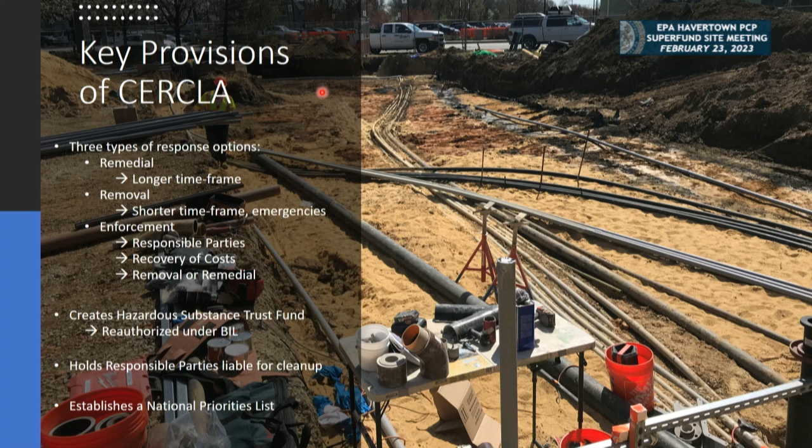We also have a program under Superfund referred to as removal. Removal and remedial work together a lot - that's happening a lot at the Havertown site. You can think of removal as dealing with emergency situations, or more shorter term acute spills or releases, or newly discovered potential threats to human health and the environment.

And then there's another part of Superfund that we call enforcement. What it really boils down to is Superfund has a goal of making the polluters pay their responsible portion for the work that's done. That can be through responsible parties performing removal and/or remedial actions, or paying EPA back for the federal tax dollars that we expend to perform the work at the site.

Under enforcement, we use the evidence we gather, where possible, to have responsible parties conduct the investigation and cleanup work. Superfund is called the Superfund because it collects a tax on the oil and gas industry, and on chemicals. Those taxes go into a fund that helps pay for investigation and cleanup work at sites where there is no responsible owner, or where the responsible party or parties are not solvent enough to perform all of the work. That tax expired in the early 2000s, and was just reauthorized under the bipartisan infrastructure law that was passed, so now it's actually just starting to kick in this year, in 2023.

One of the other things that Superfund does is establish a process upon which a site can be added to a list called the National Priorities List. That's essentially when a site becomes an official Superfund site, when it goes through the process to be added to the NPL.

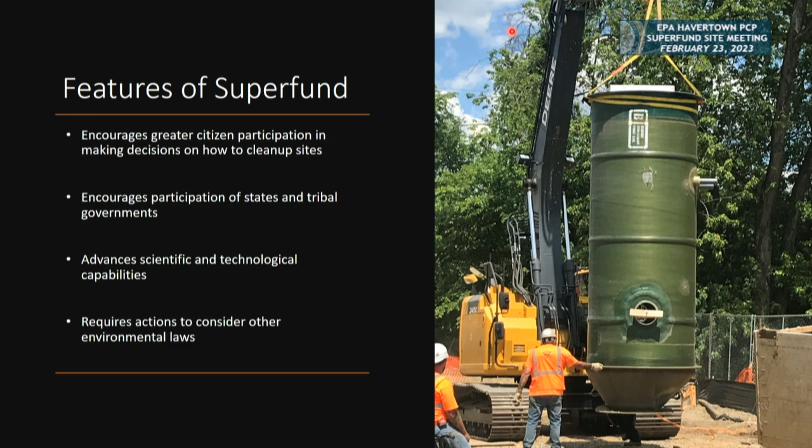States and tribes are also highly encouraged, or required where possible, to participate in all of our work. Some of what we're doing is cutting edge, especially as we move further along in attempting to treat contamination while it's still in the ground. Superfund really pushes the boundaries, working with academia and our Office of Research and Development to develop new approaches for addressing contamination. We have a unique facet in that not only do we have to follow the Superfund law and process, but we specifically have to take into account other federal, state, or local laws applicable to the work we want to do.

I'll use a weird-sounding acronym later called an ARAR. When you hear ARAR, it really means other federal, state, and local laws besides the Superfund law - we'll talk about what that means. That is a unique requirement of CERCLA, that we must take into account those other regulatory components that apply to the site.

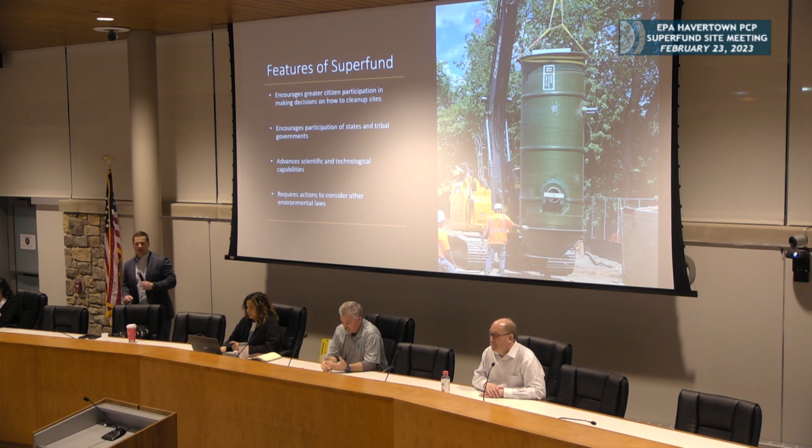If anybody else in the room knows more about this history, I love talking about this stuff because I always learn more about the things we don't know, or that at least I don't know, because not everything makes it into the records we have, and I certainly can't read every word in every record we have.

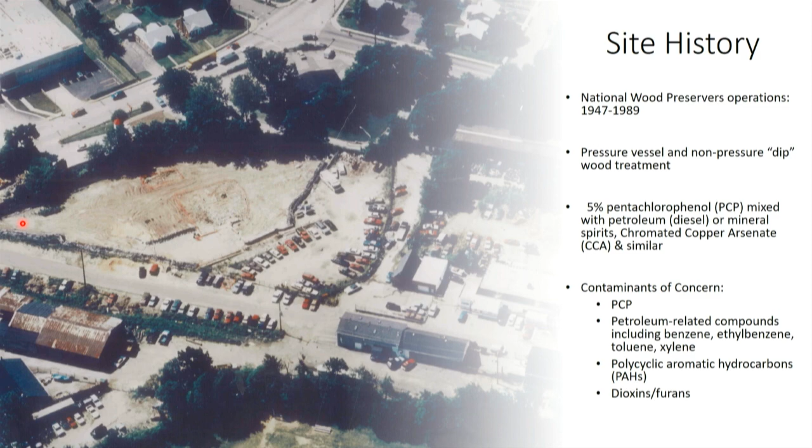National Wood Preservers used different chemicals to treat wood, either through pressure treatment, like typical pressure-treated wood, only not with the chemicals we use nowadays, or there was a dip process used to dip timbers for things like railroad ties or other pressure-treated wood needs. Then that wood was allowed to sit and dry on the property before being put out for sale.

The main preservative, the main protectant, was a chemical called pentachlorophenol, PCP. It's not the drug, but it's the same acronym - pentachlorophenol. That's our main bad actor here, the main contaminant we deal with, but there are many other contaminants associated along with the PCP. The PCP was mixed with petroleum products, typically diesel fluid or diesel fuel, or mineral spirits, for several decades. Eventually that process changed over to using metal salts, such as chromated copper arsenate, later on.

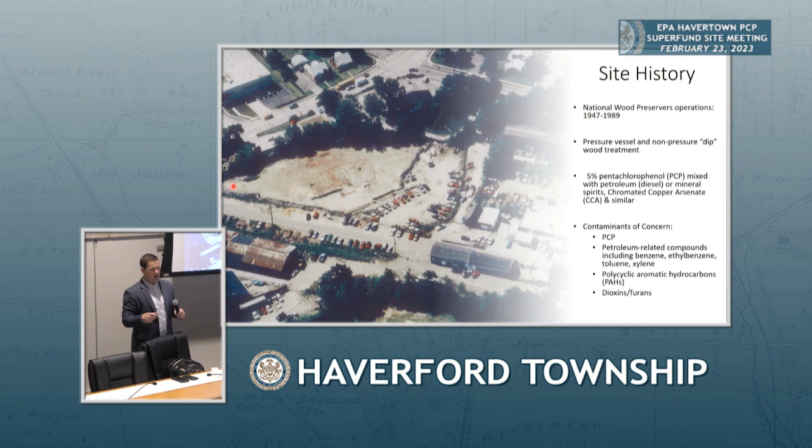But the main operation that really impacts what we see and what we're dealing with was this process that involved pentachlorophenol. So at the site, we have a wide range of contaminants of concern, but our main issue, our main indicator contaminant that we look at is the PCP.

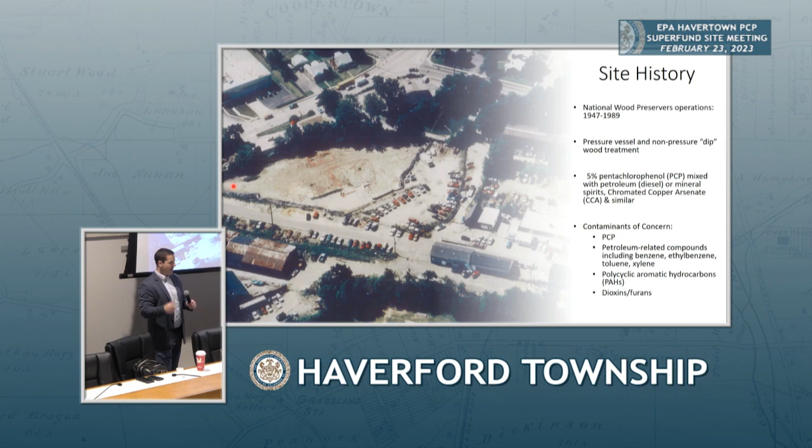Dioxins and furans are listed at the bottom of this. They're not as prevalent as the PCP when it comes to making up the overall mass of the concentration of contamination in the groundwater, but they also have a very high toxicity level, so much lower concentrations of dioxins and furans can also present unacceptable risk.

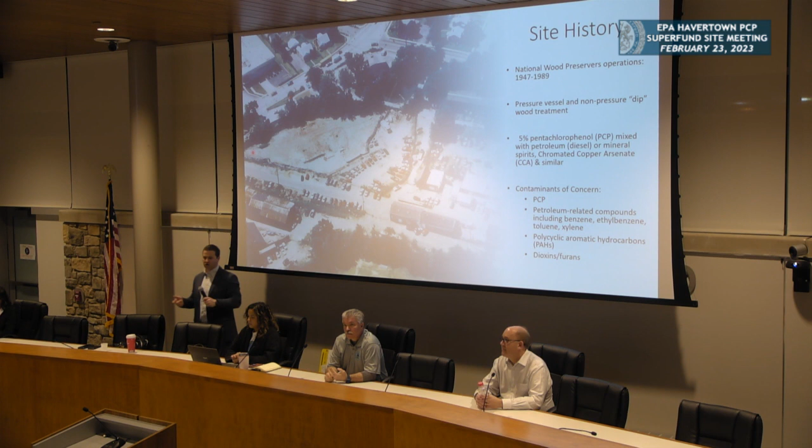We do have other petroleum-based compounds such as benzene, ethylbenzene, toluene, and xylene, and some other heavier hydrocarbons that we refer to as polycyclic aromatic hydrocarbons, or PAHs. All you really need to know is that PCP is the primary contaminant we're going to be discussing tonight, but our treatment process treats all of the contaminants of concern in our treatment plant.

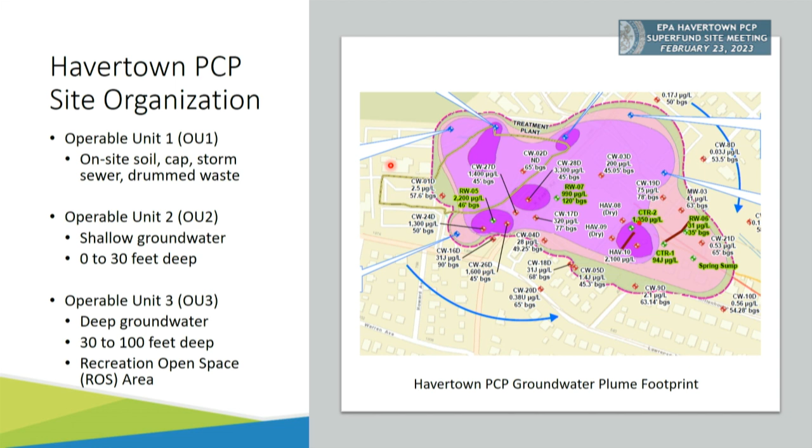Just for reference, if you could highlight Eagle Road, which is running essentially right here, and then Lawrence Road is running across this way. So just to reference, this area shown on the left with the yellow line represents our cap that sits over the former National Wood Preserver property. What's on top of that right now is the Mr. Storage facility, and some of the other industrial businesses to the west of that - just trying to orient everybody.

So the site is broken down into three different OUs, operable units. OU1 deals with the wood preserver site itself and the soil contamination that was there. There's a synthetic or plastic cap that sits on top of that, and then soil and other fill material placed on top of it. There was drummed waste that was removed from that site back in the 80s and 90s.

We also have a storm sewer that runs from Lawrence Road down behind Rittenhouse Circle and discharges into Naylor's Run. The lower section of that storm sewer, a 36-inch concrete pipe, was leaking contamination into Naylor's Run because contaminated groundwater was getting into the pipe through cracks. That lower part of the pipe was sealed as part of our work with OU1.

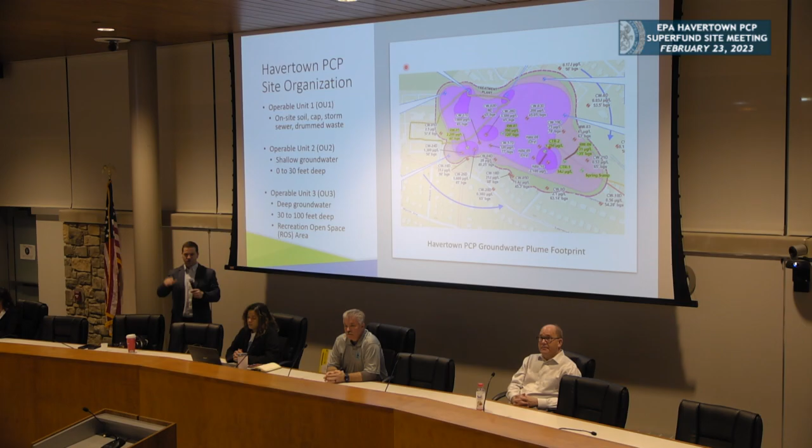The other part of the site is OU2 and OU3, which both pertain to groundwater. OU2 deals with the shallow groundwater, from ground surface down to about 30 feet deep, which is where you start going from overburden material like sand, gravel, everything that's not rock, down to the bedrock interface. The bedrock surface is give or take around 20 to 30 feet in this area.

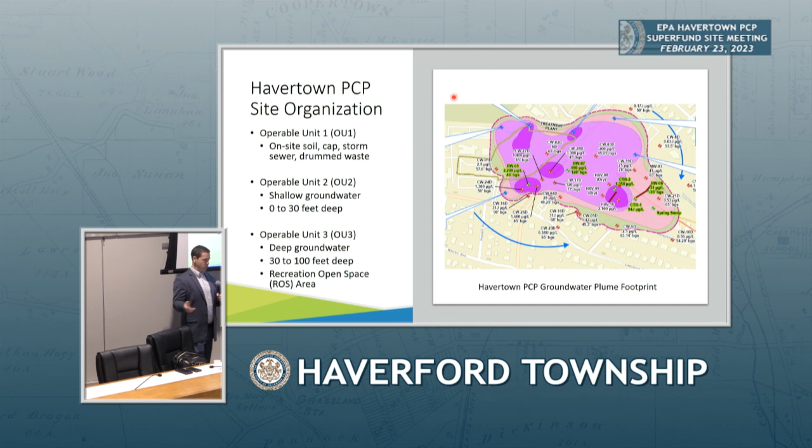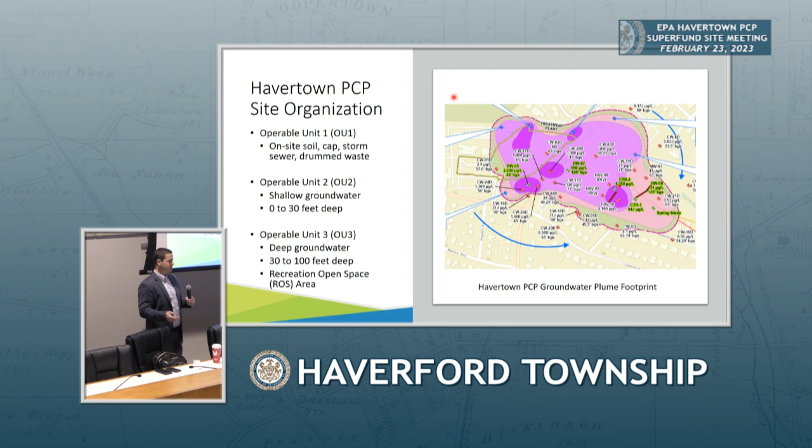That also pertains to a secondary source area created because of an old sanitary sewer line that ran from the former Philadelphia Chewing Gum factory, which is where the YMCA is now. That sewer line conveyed contaminated groundwater through a pipe that had been forgotten, and it was discharging into an area called recreation open space, owned by the township east of Rittenhouse Circle, back near Naylor's Run. It's a small area that we addressed under our last cleanup for OU3 as well.

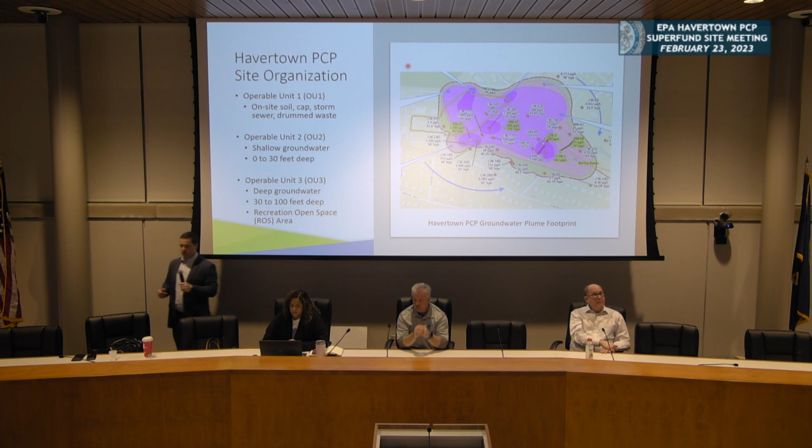So we call that the ROS area, and we have a map of that in a little bit. Next slide, please. So I'm almost done with the site background - we can stop for questions.

One other thing that's important to know is that the federal government owns a couple pieces of property that house our infrastructure for the site. The former Lobbs Lumber property is the large rectangular piece up here, and these are approximate boundaries. You can see the Mr. Storage directly to the south, and this aerial actually is of our current temporary facility where the permanent treatment plant used to be and the new treatment plant will go. But this is property that we own.

The Army Corps of Engineers is actually the holding entity for that parcel, as well as there's a piece of residential property that was subdivided, that triangular piece east of the parking lot for the YMCA, which was subdivided and purchased by the Army Corps of Engineers for EPA in order to implement our initial response action for groundwater under OU2.

There is a 20-foot deep subsurface trench filled with rock and pipe that collects groundwater at that point and pumps that water back up to our treatment facility for treatment. That's a prime area that is capturing a lot of our shallower groundwater contamination. When I talk about the CTR area, that's when I'm talking about that little triangle. CTR stands for collection trench. The other area, the treatment plant property or the Lobs Lumber property, is the larger property.

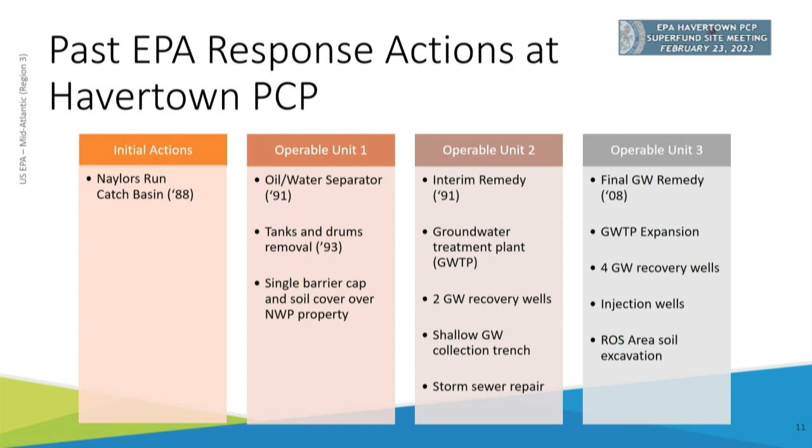We also had that groundwater collection trench that was installed in the CTR area, east of the YMCA property. There was also the storm sewer repair that I mentioned previously. And then under OU3, that was our final groundwater cleanup, meant to be the final solution for the groundwater contamination.

We expanded the treatment plant, upgrading our capacity from around 40 gallons per minute of treatment up to 55 to 65 gallons per minute. There were 4 new groundwater recovery wells installed, 3 in that recreation open space area, and 1 more along Eagle Road.

And the trench was installed there. And actually, for some reason, I had the storm sewer repair listed.

I'm sorry, I was looking at the second to last column on the right. So the 4 recovery wells were installed. There were also some injection wells that we installed in the cap, where we wanted to take the groundwater we were treating and inject it into the area of high concentration soil contamination to try and flush it out, so that we could further extract that contamination that might be trapped under that liner.

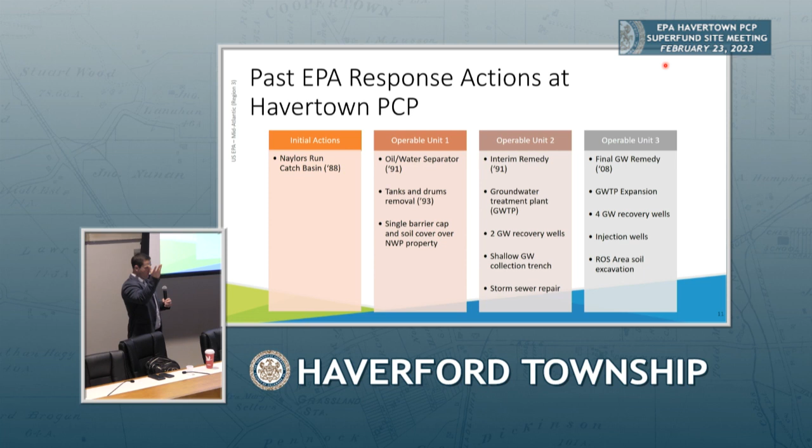And then we had the ROS area east of Rittenhouse Circle, where we removed soil contamination because the oil, the free product that had traveled down the sewer line, this abandoned sanitary sewer, was literally high concentration material that had just come up out of a pipe, straight up out of the ground, and essentially created a secondary area of high concentration soil contamination, and that was removed. So, next slide, please.

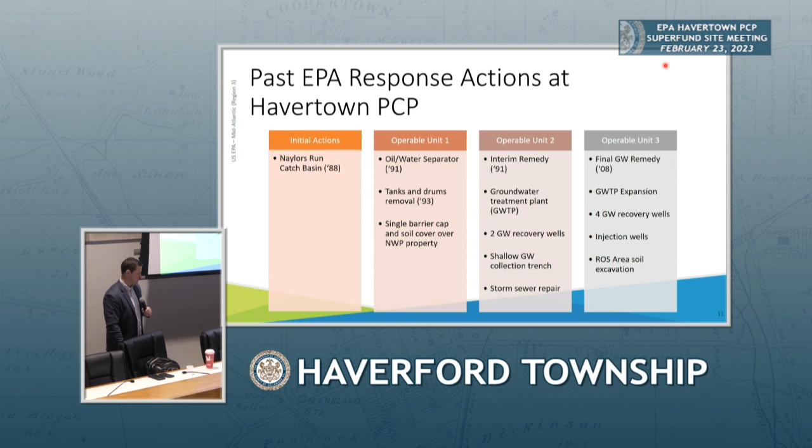All right, I am not going to discuss every bullet, every sentence on the slide, but what I want to show here, really this is the genesis for why we are here tonight to talk about the EE/CA. Why did we have to demolish the treatment plant that was previously there?

It all started in 2018, which, if you remember, we had a record year's worth of precipitation. The water table had become elevated in this area and in other parts of the Commonwealth, other parts of the Mid-Atlantic, and the result of that rise in water table had resulted in shallow groundwater contamination in areas east of the YMCA, along the Rittenhouse Circle area, actually coming up out of the ground surface and seeping out into soil, into grassy areas on one or more residential yards.

We had a report of a sheen in someone's driveway, as well as additional high flows of water into their crawl space beneath their house. Their sump was running constantly.

So myself and Colin actually responded to this complaint in early 2019. To make a long story short, we conducted sampling, a couple different rounds, and we found that multiple residential properties had concentrations of contaminants either in the soil, in the water that was seeping up out of the soil, or in the water that was in their sumps in their basement.

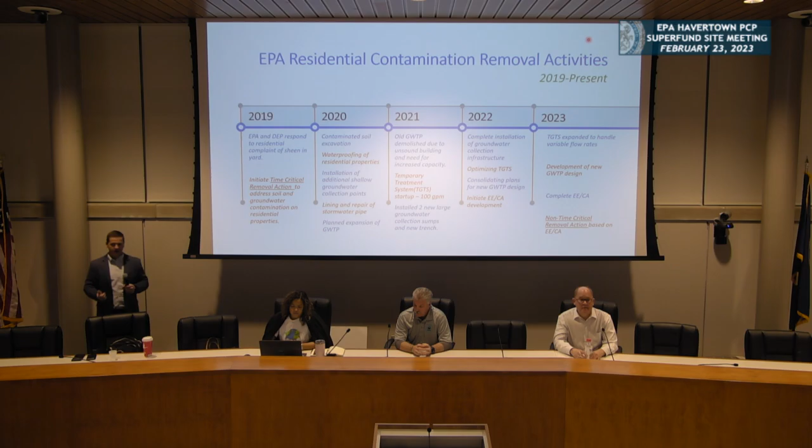But prior to doing that, we brought in the temporary treatment system—again, not winning any beauty pageants. Right now that's an amalgamation of different treatment components, actually with a higher treatment volume rate than the old plant, and then we had to demolish that facility.

So we had to take our design for this expanded treatment plant and begin to tweak it so that we could implement a larger groundwater treatment plant construction.

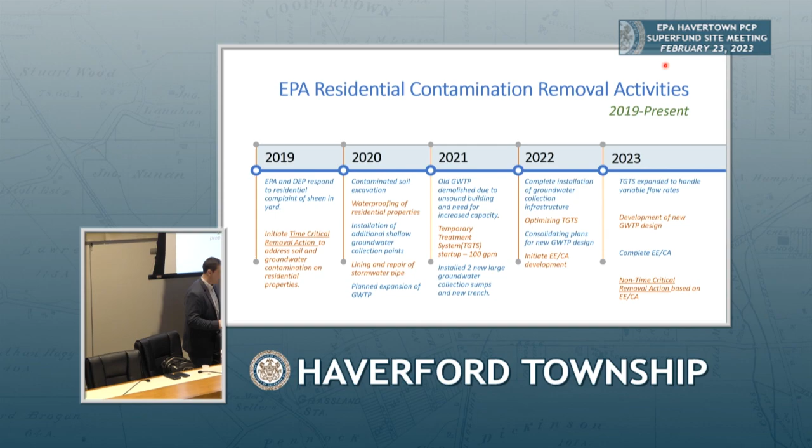That continued into 2022, and we completed all the groundwater infrastructure installation that was needed. That included a new force main that we horizontally drilled underneath the YMCA without having to disturb most of the YMCA's parking lot. It's not under the building itself, it's under the parking lot.

We were optimizing the temporary groundwater treatment system, and then we identified the best mechanism to build this new treatment plant, which we know we need to construct, was through this process of the EE/CA.

We cannot just, in order to obtain Superfund money and utilize it for response action, we have to have the right administrative documentation in place.

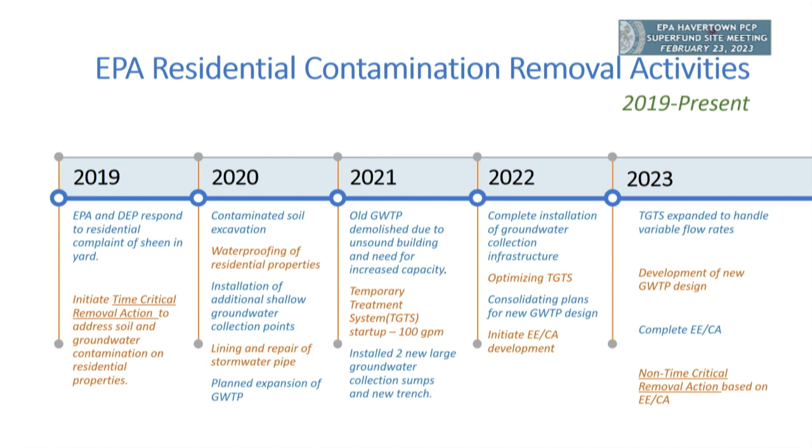And the size and scope of building a new treatment plant, we could not genuinely authorize under the historic site documents. So we needed to find the best and frankly quickest way to get to a place where we could obtain that funding from EPA headquarters and move forward with the increased treatment plant construction.

And the best way to do that is through this EE/CA process. This EE/CA is going to lead us into a non-time critical removal action. It sounds like a removal action, and it is, but the only real distinction between a removal and a non-time critical removal is that you can have more than 6 months of planning needed.

We know that with the design and construction of this treatment plant, there's far more than 6 months that we're going to need in order to implement it, and the different alternatives we'll discuss tonight lended itself to the EE/CA process, as opposed to some other, more complicated and probably much more lengthy administrative processes to get us to the same point.

Which is making sure that we have the ability to build this expanded, larger groundwater treatment plant. I'm sorry—too many words, and I'm almost done with this first half, and then more to come.

So here we are now, 2023. The temporary groundwater treatment system that's there has been expanded—we've kind of pushed it to the limits that it can meet in order to handle as much flow. It's not that it's under capacity, it's more that there's intermittent flows. It's not always the same amount of water that's being collected from every point, and I can discuss that.

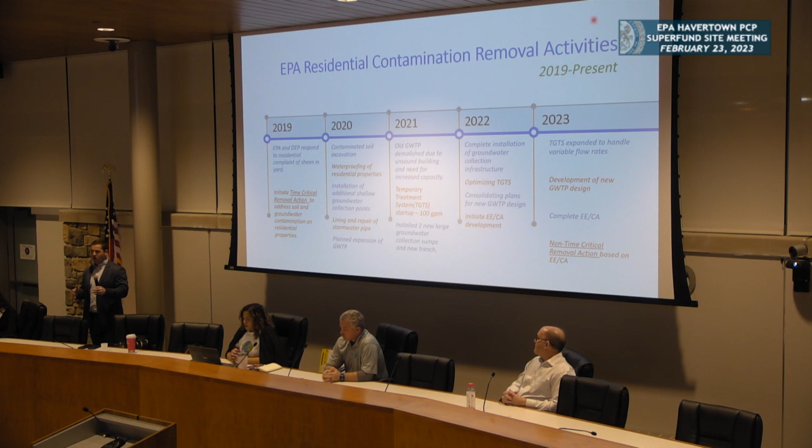We have this new groundwater treatment plant that we're close to finishing the design on. We have the EE/CA, which is out for public comment now, and then what happens next later this year is the non-time critical removal action memo, and I will talk about that as well.

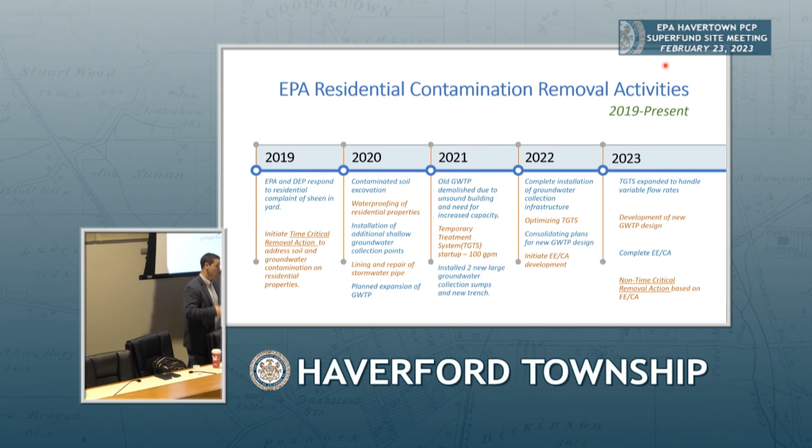Next slide. All right, my last little part here is to just show what all these things that I talked about look like on a map, and talk about this deeper groundwater that we want to address.

This map here has been redacted. The big gray area is parts of Rittenhouse Circle and Lawrence Road that are grayed out just from a private information standpoint, because we have been working on residential properties in certain instances.

As I mentioned earlier, the hashed area on the left with the yellow border, that is our cap. All of the other points shown along Eagle Road, RW3, 7, and 5, are our groundwater collection wells. Actually, RW3 is not operational right now, but RW7 and RW5 are the backbone of our deep groundwater collection system.

Further to the east of the YMCA, you see those two large red lines. The longer one, shaped like a flat V, is on that CTR property. That's the original trench. The shorter one is a new trench installed as part of the time critical removal action to achieve the same purpose. It intercepts shallow groundwater, and the green line represents a force main that conveys that water from the trench down to CTR.

CTR1 is that very large green cylinder I showed a picture of earlier. That's an 18-foot deep sump buried and set on the CTR property. It sits on bedrock. It has two twin pumps that each have the ability to pump up to 75 gallons per minute, and it's really become our main hub for all groundwater collection. All of the groundwater collected from the residential sumps, the spring sump shown in green on the far right, and all of the infrastructure down in that area all go to this CTR1.

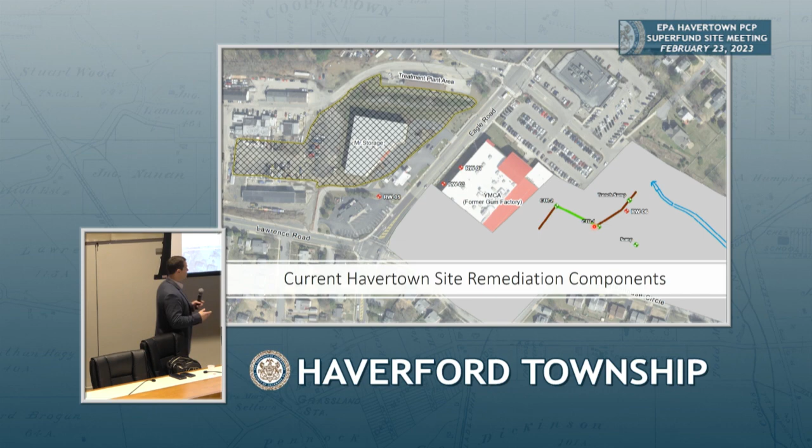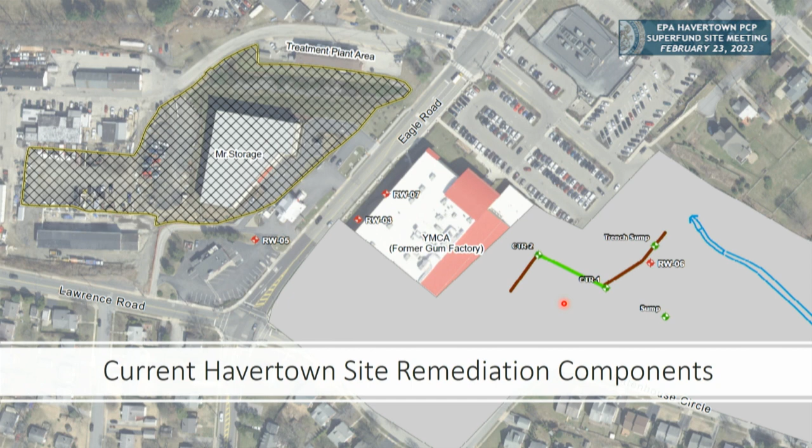Think of it as a mega sump. It's huge, it's got all the capacity, it's got backup in order to convey all that water up to the treatment plant, and all of that is done through a pipeline or series of pipelines that run under the YMCA property. They're not shown on this map, but those lines all run under the YMCA parking lot back to our treatment facility.

Despite the need for the new treatment plant, we've been working here for decades, and we've made a lot of progress with regards to the removal of the contamination mass that's in the groundwater.

This groundwater has moved down not only through the gravel and sand that's on top of the bedrock, but the bedrock itself is fractured. Typically in this area, the aquifers that are pumped have water existing in fractures and cracks within the bedrock. As long as that contamination has been there, it's going to take us at least as long to pump it out, due to mass balance and the absorption of contaminants into the rock matrix in certain instances.

Next slide. All right, last little bit here before the break for questions and discussion. Not doing bad, all right.

One of the things we did not understand was why this contamination presented itself in these residential properties in 2022. Now we think we know why. It was because of the water table, and the elevated water table, as I explained.

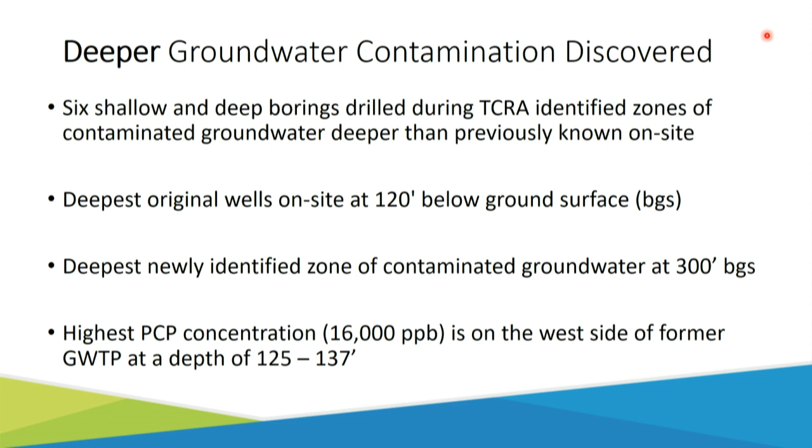However, there were questions regarding the extent of the groundwater contamination from a depth perspective, whether or not we had really found a bottom on that or not, and whether there might be something we were missing that could be more than just a higher water table.

During the removal action, we drilled six new pairs of wells: shallow wells above the bedrock, and deeper wells that went to a depth of almost 300 feet. Previously, the deepest well on site was 120 feet deep, so we went nearly three times as deep.

In all locations we found groundwater contamination, primarily PCP, and in certain instances very high concentrations. This is not PCP that anyone is exposed to, since it's in the deep aquifer, there are no vapors emanating up into the subsurface to accumulate under buildings, and there's no potable groundwater use in this area. But there were high concentrations of PCP nonetheless. I have a map to show this in just a second.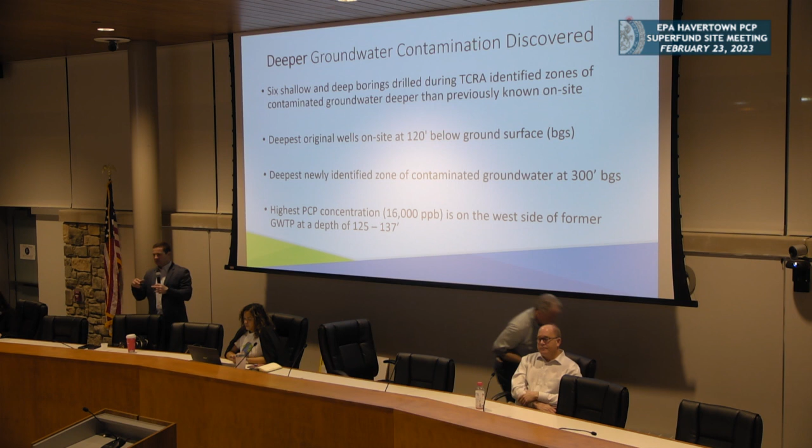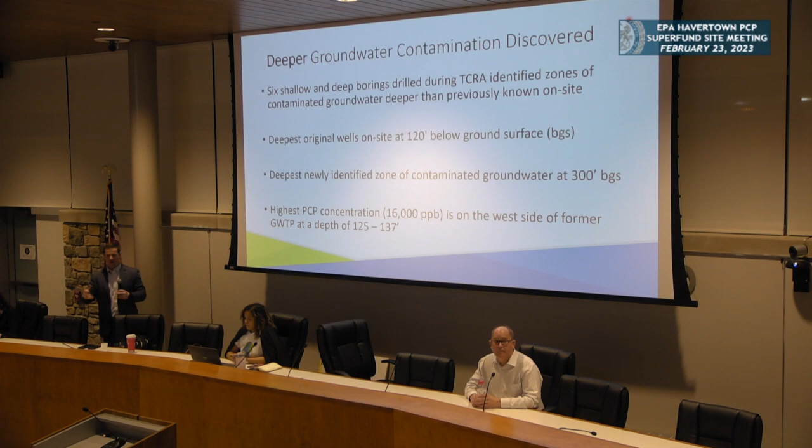Our highest concentrations were on the groundwater treatment plant property, near where the Lobs lumber plant existed and next to the wood preserver facility, with concentrations up to 16,000 parts per billion of PCP. For reference, our cleanup number is 1 part per billion. That's where we found oils floating in the boring at very high concentrations, at a depth of around 125 to 137 feet.

Moving to the next slide, this is a busy map, but the six call-out boxes circling this area all point to the blue and white circles, which are those deep borings. The numbers in red represent the highest concentrations we found. You can see the very high concentration at 41D to the left, right next to the former treatment plant.

We also have concentrations across Eagle Road beneath the YMCA parking lot that go quite deep, contamination found at 73 parts per billion at 220 feet. Around the area, essentially we had concentrations well above our cleanup standards at nearly every depth, and these depths correspond to the actual fractures in the rock that are producing water.

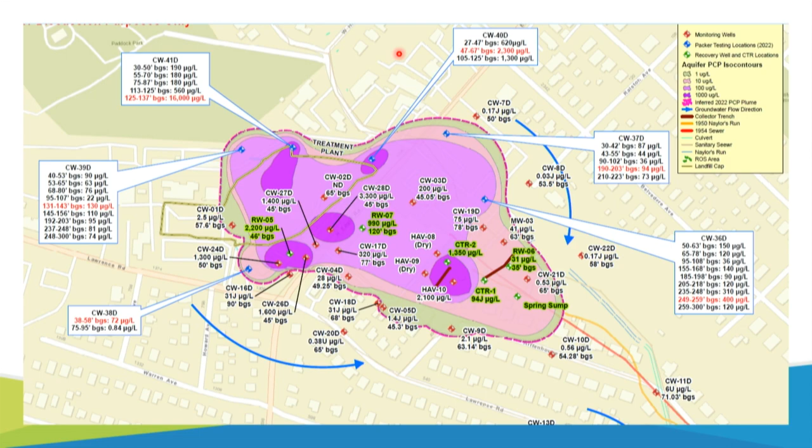After drilling these borings, we send different sensors down to analyze the rock and the water coming out. It's very helpful to understand that you can have clean groundwater coming out of one fracture and contaminated groundwater coming out of the fracture just above or below it. If you're going to pump these wells, you want to target the right zones, not pump clean water and dirty water together if you can hit just the contaminated fractures.

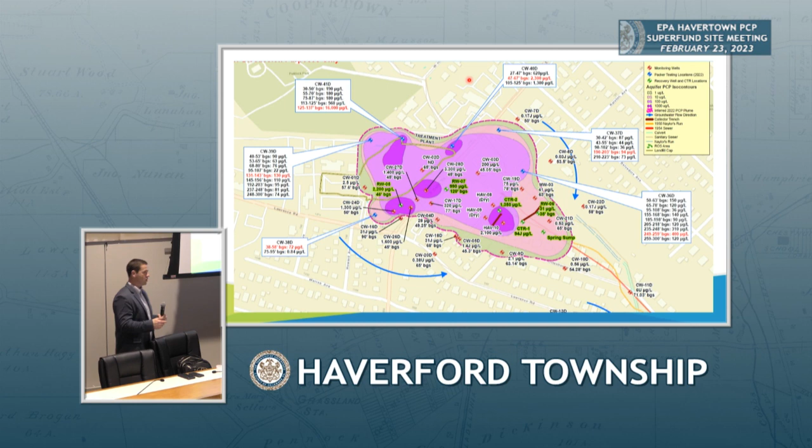This is my last slide before we take a break for questions about this or anything else. I want to summarize that the 2019 removal action and everything else we've done have addressed any current exposure pathways related to the site contamination.

All known site contamination was removed during the removal action, or it's under the cap at the former NWP facility. All the groundwater that was impacting residential properties is being captured and contained, there's no contamination seen in the sumps, and those residential properties have been waterproofed on the inside. We perform annual inspections and repairs where needed, so those exposure points have been addressed.

There's no known surface soil or creek contamination that presents an unacceptable risk. We regularly monitor Naylor's Run and have collected confirmation samples for all the surface soil in the areas we excavated.

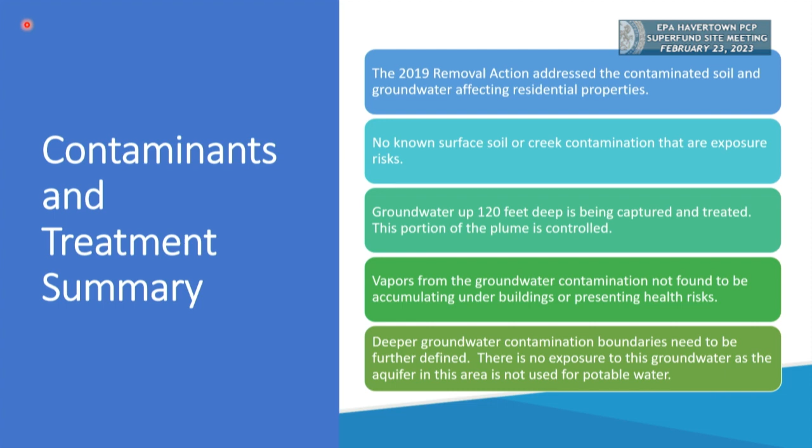So everything down to approximately 120 feet is within our zone of influence for our capture zone. There might even be a little bit below that deepest recovery well where we have some influence. That portion of the plume is controlled, and that's the portion that in certain instances has daylighted either in Naylor's Run or in residential properties.

We've performed 3 different rounds of vapor testing in the past. In certain Superfund or non-Superfund contamination situations, you can have contaminants dissolved in the groundwater or present in the soil that give off vapors. We're all familiar with the odor from, say, a can of gas—those are vapors volatilizing off the pure gas. The same thing can happen from contamination dissolved in groundwater or present in soil.

If the conditions are right, contaminants can go from solid or liquid form into vapor form, move up through the bedrock, move up through the overburden, and accumulate under buildings. In certain instances, vapors can get into buildings and present a breathing risk.

We've done multiple rounds of what's called vapor intrusion investigation at the site, on 3 different instances. The YMCA, when it was built, installed a vapor mitigation system underneath their foundation. That system currently acts passively, but they've tested it and there's been no accumulation of vapors there.

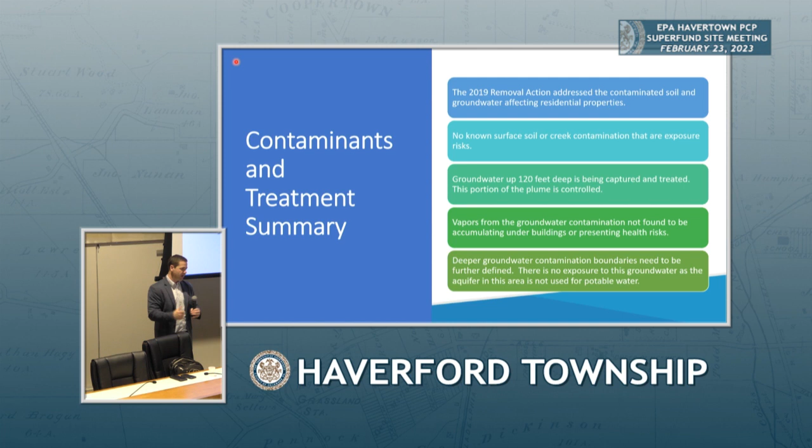Next slide. All right, that was a lot. I'm really sorry, hopefully I did not put you to sleep too quickly. But please, if there's any questions, we can discuss them now. There's a microphone right here—if you want to come up to the podium. We're going to use the podium if you can, or I don't know if we have to since it's such a small group, but it won't be recorded if we don't. So here we go.

Using your quote, there is no exposure to this groundwater as the aquifer in this area is not used for potable water—that's correct? Correct, yes. Is that aquifer used for any other areas of potable water?

That's a good question. We have an inventory of all known wells anywhere in this area used for potable use, and none are within the boundaries of contamination or down gradient of our contaminant areas.

Is anyone using this source of water for potable water? No. You're certain of that? Based upon all the information we have, correct, yes.

Thank you. I would say there are geothermal wells that aren't really using the water, but those borings—we do know of a few properties upstream of the site, far west of the site. We looked at a wide area just to see if we could find any, to make sure there's no potable use or any kind of wells. But for the sake of being honest, there are geothermal wells where water goes down pipes and up out of pipes in bedrock—it's contained, not touching the groundwater. That's what we're aware of.

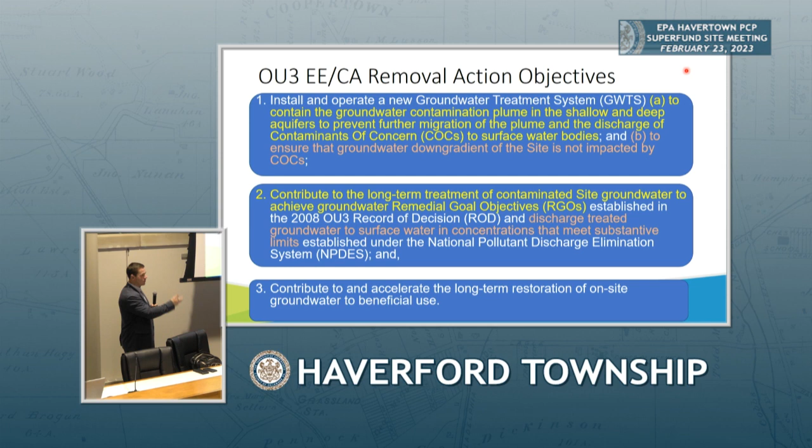Next slide. This is the worst slide you're going to look at tonight, maybe ever, and I'm really sorry, but because I want to be thorough, I've taken the word-for-word 3 objectives out of the EE/CA. I'm not going to sit here and read them to you, but I did want to highlight a couple things. There are 3 objectives, and the first 2 actually have 2 sub-objectives, if you will.

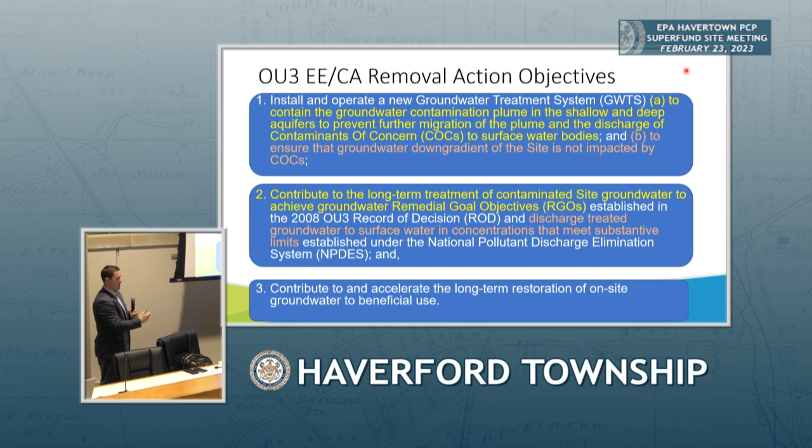One, we want to make sure that we contain the shallow and the deep parts of the aquifer that are contaminated. This is a very important distinction, that we want to hit both the shallow and the deep groundwater. We also want to make sure that we are preventing the down gradient movement of groundwater contamination, and this would apply in any direction. Down gradient can mean different things. Generally it means downstream, the groundwater is flowing this way, and we don't want it to go any further than it already is. If you remember that one slide, you can see how much the groundwater plume has shrank over time - that's stopping things from going further down gradient. But down gradient could also apply to movement down the bedrock surface, if it's happening.

Within the second objective, we want to fit into the overall long-term cleanup strategy for this site and achieve the remedial goal objectives for groundwater. I've got a real doozy of a slide coming up next, almost as bad as this one, that talks about all of our individual numerical cleanup standards, which we won't go into, but I want to give you a sense of what's going on with the cleanup standards. We want to be consistent with our previous cleanup numbers, and we want to treat all of the groundwater we collect to the standards we're already meeting, which are based on the regulations from the Clean Water Act. We also want to contribute to and speed up the overall long-term cleanup of the groundwater contamination at the site through this non-time critical removal action.

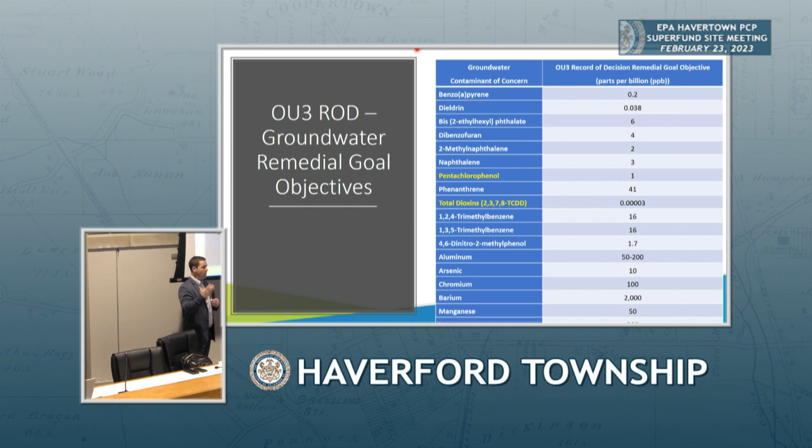Next slide. Here's that slide. Again, you can peruse this at your own leisure. This is from the OU3 record of decision, which was the final groundwater cleanup, and these are all the different groundwater cleanup numbers that we want to eventually meet in the bedrock aquifer, or actually in any of the groundwater. My point in putting this up here is to show the long list of different compounds and inorganics that we have included with cleanup standards. I also want to show that there are standards for each of them, and I want to highlight the 2 basically key drivers of the work we've done.

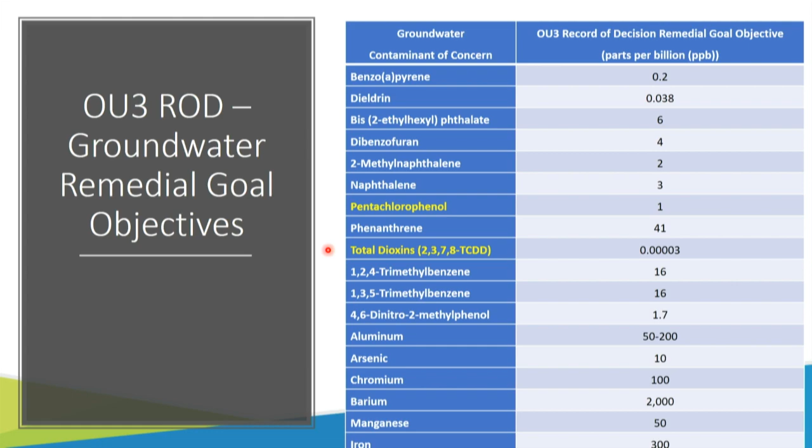It's the pentachlorophenol and the total dioxin. As I mentioned earlier, PCP has a cleanup standard in the groundwater of 1 part per billion, and the total dioxins have a cleanup standard of 0.00003 parts per billion, which is even less than 1 part per trillion. So we don't really have a lot of dioxins that we're collecting anymore into the treatment plant. But that doesn't mean they aren't present above cleanup standards somewhere else in the aquifer. It's just that the overall volume of groundwater we're bringing into the system does not have dioxins currently above our cleanup standards overall.

The second alternative is to continue collection of the groundwater and treating it with the system that's already present. It's there, it's working, it's a temporary system that's a combination of different treatment components, and to leave it as is, treating approximately 100 gallons per minute, continuing to operate that in perpetuity and monitoring the site. The third alternative is to build the new permanent groundwater treatment plant and to install additional recovery wells.

This third alternative involves a capacity of at least 175 gallons per minute treatment, with anywhere between 4 to 8 additional recovery wells in addition to what we already have. We would operate this facility.

First, after it was built by EPA, we would run the plant for a period of time before transitioning it back to the Pennsylvania DEP. The temporary treatment system that's present would be dismantled as soon as the new treatment plant was operational and demonstrated to be working properly, and we would continue our long-term monitoring of the site.

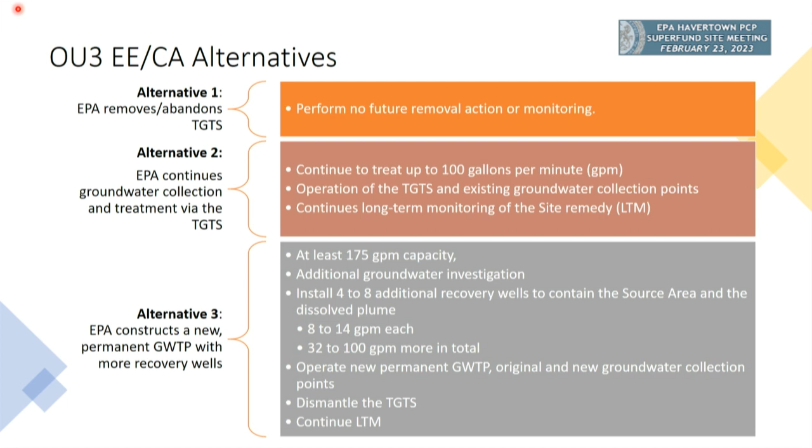How protective will it be while we're building it? How protective will it be for the public and for the workers constructing it? Does it work in the short term, and what about the long term? Long-term effectiveness is one of the things we're going to talk about a lot in a minute. Are we reducing the toxicity, mobility, or volume of the contamination that's there? Are we complying with those ARARs, which are all the state, federal, and local laws and regulations that might pertain, and any kind of residual or other effect concerns of the treatment system process, or any alternative?

Implementability is how well you can put into action the alternative you're evaluating in that EE/CA. Is it something novel and never been done before? Are the materials available? Is there expertise and knowledge on how to design and build any type of alternative? What is the community and the state's perception or acceptance of that alternative, and what types of approvals or permits would be required, or permit equivalents?

And then in our EE/CA, we have actual estimated costs, but sometimes in an EE/CA you can have a high, medium, low cost evaluation. We went more detailed on this one, but cost is the other main component, obviously.

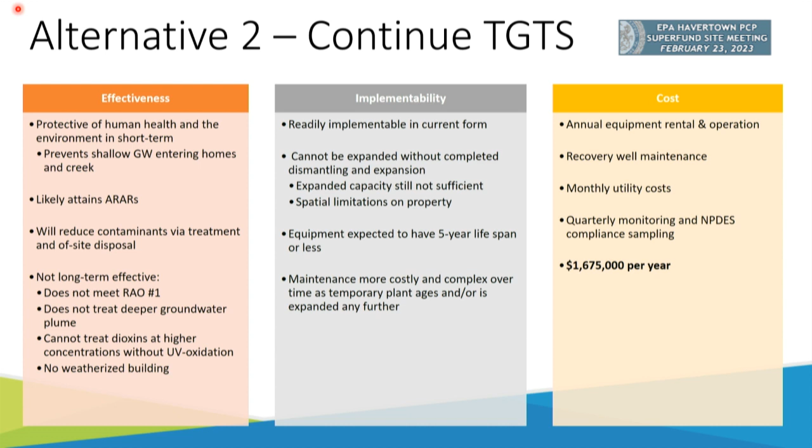Those lamps are very high voltage, very high electricity draw. We have not needed them for several years because the dioxins come into the plant below our cleanup standards. But if we were to hit higher concentrations of dioxins coming into the treatment plant, the temporary treatment system really is not designed to handle that type of electrical load on site. It would not be practicable, nor do we have a weatherized building there, for installation of a UV oxidation system. So we would have that constraint if we were to have those dioxin levels go higher.

One could expect that when you start pulling in new high concentration groundwater with high concentrations of PCP, and because we've seen PCP historically co-located with dioxins and furans, you could potentially see higher concentrations. We haven't seen that in the groundwater we've hit thus far, but it could happen. And there's no weatherized building that exists right now for that treatment facility.

Any of you have driven by, I didn't put any pictures up here, I apologize. I wasn't trying to avoid looking at it, I just forgot to put them in here. But a lot of things have been bolted together, and there are exterior components and large frac tanks that are there. There's the temporary tent that's out there. It's not weatherized, it's not weatherproof.

From an implementability standpoint, however, it's already there. We are running that treatment facility now, so it is readily implementable. The challenge becomes in the long term. We don't have any solid steel piping out there or PVC. Generally, it's rubber hoses that connect the different parts of the site. Those are fine for short term, but the temporary system is just what the name says - it's meant to be temporary. No more than five years, but really on the time scale of one to two years before you need to start switching out different components and processes within the temporary treatment system. So it is implementable, but things start to get more challenging the longer that treatment system sits out there.

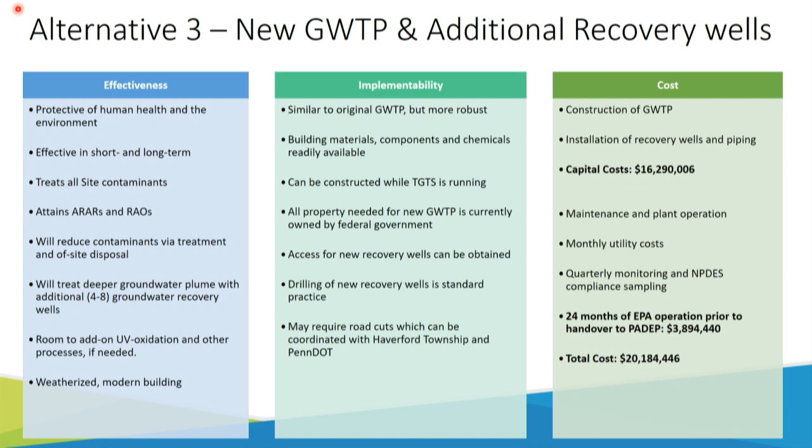There is room that has been set aside in this building that we've conceptually designed to put in a UV oxidation system, an air stripper, any other type of treatment component that might be needed. It's worth noting that we've been running this treatment facility, and the temporary treatment system that's there now is just like the one that used to be there, only put together in a different order - but it's the same general process components. We have a recipe that works for treating this groundwater, and every wastewater treatment plant has its own unique foibles and things you have to deal with. Ours has to do with the hardness of the water and the manganese and iron we have in this area, and some other unique constraints. But it's a known recipe for how to achieve treatment of this groundwater to the standards we need to hit.

But we've set aside this area in case we have these dioxins coming in. We would have the additional bolt-on capacity within the facility to handle not only the spatial, but the electrical load as well.

And we would have a weatherized, fully brand new, nice looking building, very similar to what you see out there now when you look at the YMCA, Mr. Storage, things like that. I have a few pictures of that at the end as well, or renderings.

From an implementation standpoint, it would be a typical wastewater treatment plant construction. It will be tight quarters because we have all the temporary treatment facility there now. However, we do have the room to build the facility there. And this is a standard type of wastewater treatment plant design that we will be implementing. The skills, the labor, the materials, the engineering are all known and readily accessible and implementable.

Same thing goes for drilling. Not only have we drilled wells the right way and the wrong way in this area in order to tap into wherever the groundwater contamination is located, we have that ability.

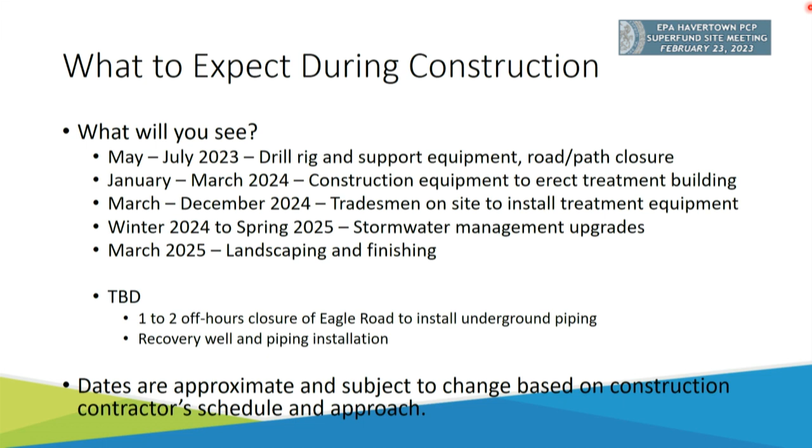Hopefully by early 2025, we're wrapping everything up in the spring, finishing our landscaping, any other finishing effects. What we don't really know, for this whole schedule, is how our construction contractor wants to go about this. We will give them the design, the drawings, the specifications, but it will be their job to tell us how they want to do it, since they are going to be on the hook for building a facility that meets all of our requirements. So the schedule could change, the order of these things could change, but this is our best guess.

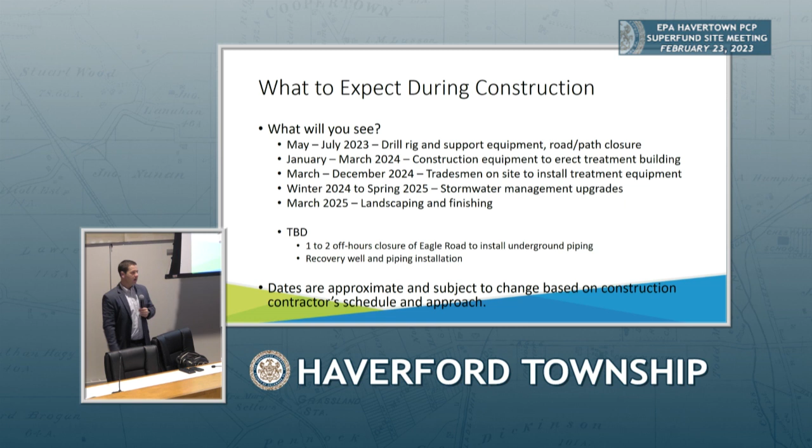Based upon our professional experience—myself, Bob, Colin, Tetra Tech, everybody—we talked about how this could shake out, and this is our best estimate right now, professionally speaking. A couple things we really don't know: when would the road closures happen? It may be that we don't have to close Eagle Road at all.

We may be able to do all of our work under Hillcrest. It may not even be necessary. We might have some, it may just be the access road that we own that we need to disturb, but we just don't know that yet. And exactly when the recovery wells fit into this, some of the ones on our facility could be done right away. Some of the ones further afield, especially across Eagle Road or south of Lawrence or north or west of the site, the further away you go, the more we have to deal with constraints on access, easements, things of that nature in the future.

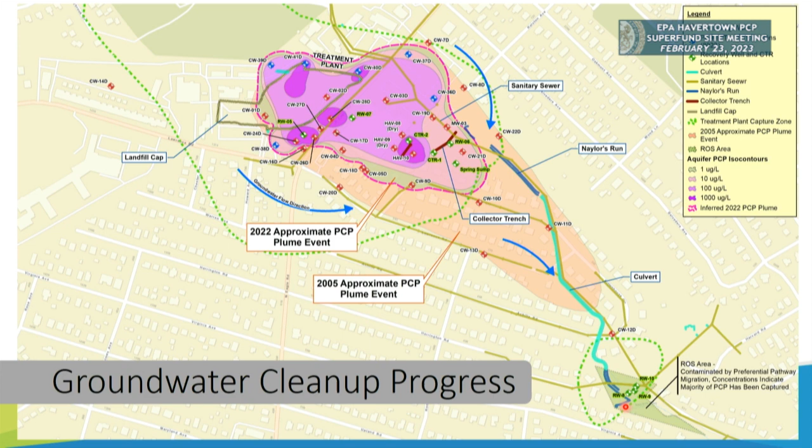So in that area, we dug out the contaminated soil in 2010, and then there's 3 groundwater recovery wells that are there now, but they only pump about 1 gallon a minute. And those wells went clean, so we stopped pumping them. And there's monitoring wells that surround them as well. And so we're not pumping that area anymore.

And you will see generally that there's no contaminants down there. However, every once in a while, we will see little spikes of contaminants in the water. And it's really just kind of sitting there. So we are looking at a few innovative approaches.

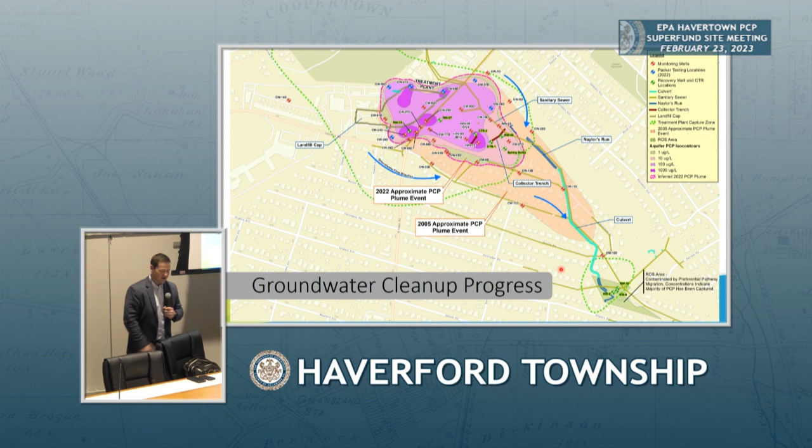There are one of the most exciting, I sound like a salesman, what an exciting opportunity I have for you. One of the most exciting parts of the environmental remediation world is the use of microbial breakdown of contaminants. Whether it's through the microbes actually consuming the contaminants that are in the ground, or if the microbes are eating something else, but essentially they're either using those contaminants to respirate, or essentially their enzymes that eat those other things are also co-metabolizing the other contaminants that are in the ground.

So because the little ROS area is, for all intents and purposes, clean, but we see these little pockets of low-level contamination in groundwater, and it's shallow, we're looking at doing some studies to see if any of the microbes that are known to degrade PCP or other longer chain hydrocarbon molecules are present. It's a shot in the dark, and it may or may not ever pan out.

But if they're present, or if the conditions are right, you can inoculate that area with these naturally occurring microbes. But they just may not be naturally occurring in that area. Or you can inject a substrate that they would start to eat, like molasses or lactate, or other kind of innocuous, non-impacting compounds that they could consume.

So it's a lot of ifs, and it may not pan out, but we are looking to see if that could work there. And if that works in the ROS area, there's potential that we could use that to help in other areas of the site if the conditions are right. But it's a lot of ifs, and it's more a science project at this point, but you never know. We do use microbial degradation as the backbone of a lot of our cleanups in other sites. So it's definitely implementable. It's just a matter if the conditions are right.